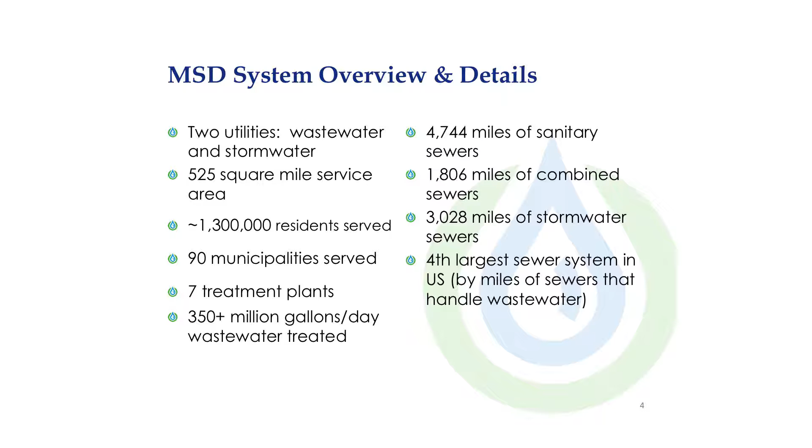How and why are we the 4th largest? Well, same reason we have 90 municipalities that we serve. As folks moved out from the city into the county over the years, they all wanted their own local police, fire, and other services, and they also wanted sewer service. So since 1954, when MSD was first created, we have taken in 79 separate sewer districts, all built to a different rhyme and a reason, a different standard, different processes for how they developed. And a lot of what we've been doing is harmonizing and bringing up to one standard all those systems.

Certainly, if we were to start over today and rebuild a new sewer system, it wouldn't be the type of system we would start with today, but it's what we have, and it's what we're working with, and we are doing a very, very good job with it.

I won't get into too much detail here, but sewer overflows essentially act as relief valves for the sewer system. When too much rainwater gets into the wastewater system, that water has to go someplace. Every sewer system has a finite capacity, so if you have rainwater getting into the system, it can quickly overwhelm the system. So in lieu of perhaps having thousands of basement backups every time it rains, these overflow points act as relief valves in area creeks and streams.

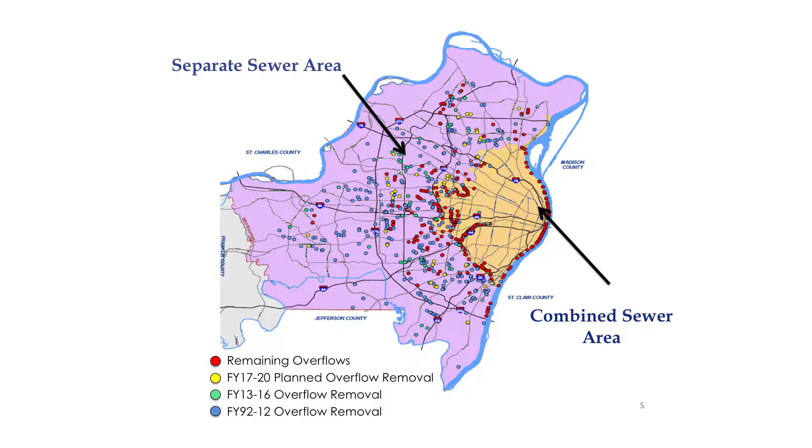What this map represents is our overflows that we have eliminated since 1992, or overflow points that will be eliminated or addressed in some way, shape, or form in coming years. Between 1992 and 2012, MSD spent over $2.7 billion to eliminate about 350 sewer overflows.

That work today continues in the form of MSD Project Clear. MSD Project Clear is a result of an agreement with the Environmental Protection Agency and the Missouri Coalition for the Environment. It calls for spending $4.7 billion over 23 years, and began for MSD in 2012. At its base level, it's our initiative to improve water quality and alleviate wastewater concerns throughout the St. Louis region.

How are we doing that? By making a long-term generational investment in our sewer system and infrastructure. It's building, designing, and doing work that totals billions of dollars of cost over a generation. So what do those various activities look like?

We also repair and maintain our system. That's another bucket for us, making sure we're developing and implementing best practices, doing everything we can to maintain that system properly, and that we're on a regular schedule for repairs.

In this category also, customer service. We have 1.3 million customers throughout our service area. We want to make sure that, especially as a government entity, we're providing the best possible customer service.

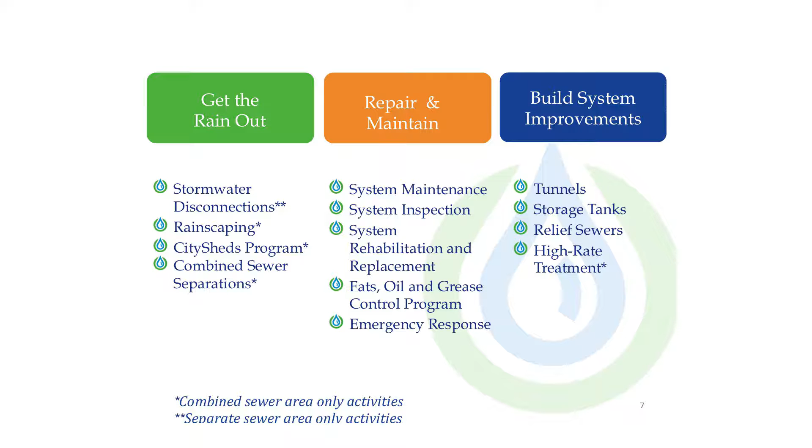We're also going to be building above ground storage tanks, and rehabilitating and rebuilding the existing sewer system as well. All total, this work is MSD Project Clear, designed to protect our system and serve our customers better, eliminate overflows in area creeks and streams, and alleviate basement backups.

Where do we stand now in 2017? We started MSD Project Clear in July of 2012, a continuation of work we've been doing since 1992. Since 2012, we have eliminated 36 of those sewer overflows.

That means we've stopped a combination of raw sewage and stormwater from going into area creeks and streams from 36 overflow points. By addressing overflows, you also address basement backups, so it's helping improve customer service.

But regardless if you know a lot about sewers or just a little, I think the one thing everyone can certainly appreciate is money. When we first started this program, looking at launching the first 4 years of MSD Project Clear in 2012, we thought it would cost about $971 million.

While the first 4 fiscal years of the program have actually come in at $905 million. So most importantly, we're bringing this program in under budget and on time.

Over the next 4 years, and we're halfway through the first year of that cycle, we project to spend another $1.6 billion. We certainly hope and plan to bring that in at budget and on time as well. But these are points we will always be accountable for to the public and transparent on, because this is the public's money we're spending. To reiterate, the first 4 years of MSD Project Clear came in on time and under budget.

With that being said, that's my update. We will now move on to the rest of our presentation, really the largest part of our presentation here, to talk about the next steps with stormwater. Joining me here to do that is Brian Hoelscher, MSD's Executive Director and Chief Executive Officer.

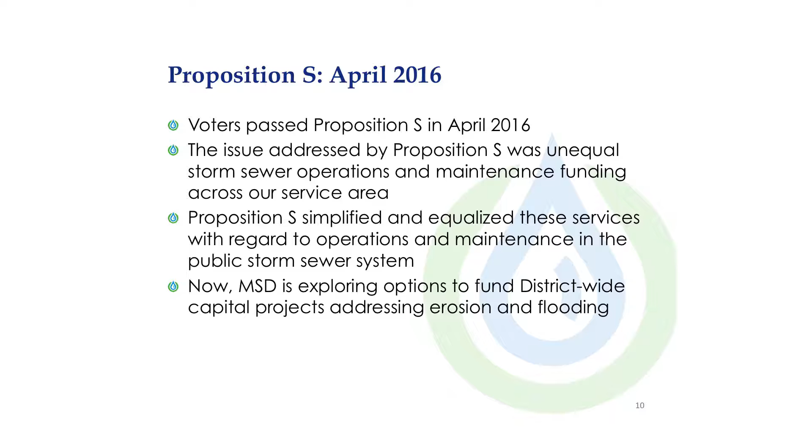With the passage of Proposition S, MSD now provides three main services district-wide. First, we provide stormwater management throughout our service area. We enforce rules and regulations for stormwater improvements, do stormwater complaint investigation and logging, as well as evaluating all stormwater issues within MSD's boundaries. We also do water quality sampling and monitoring of area creeks and rivers. We also have to monitor compliance with our Phase 2 stormwater permit.

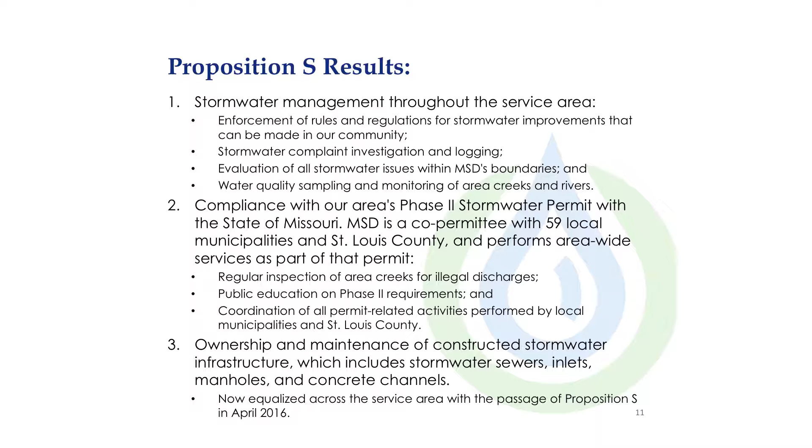We do this with 59 other local municipalities. The purpose of this permit is to help regulate and monitor the flow of pollutants that go with stormwater runoff into our local creeks and streams. And then finally, the last service with the passage of Proposition S is the operation and maintenance of the public storm sewer system.

On the next slide with the map, let's talk about where we're at with the passing of Proposition S. To begin with, MSD collects a 2-cent property tax. That pays for all the regulatory work that has to be done by MSD. MSD has always had this tax in place. We now have a 10-cent stormwater tax that allows us to operate and maintain the public storm sewer system throughout our district. That's a total of a 12-cent per $100 valuation property tax that MSD collects to provide services.

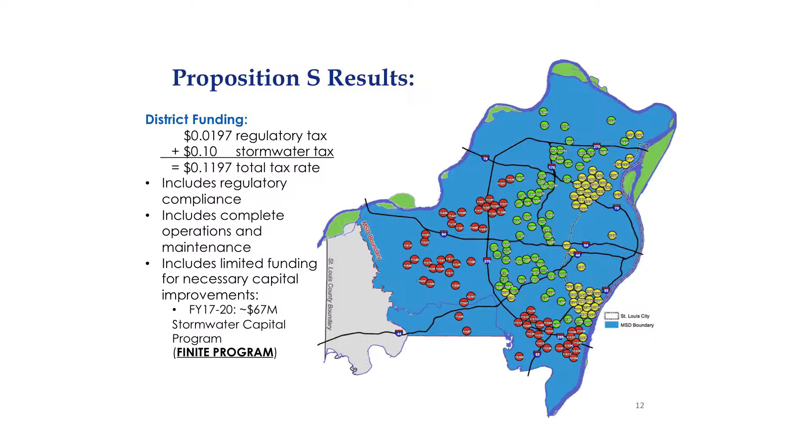With the passing of Proposition S, we also released a limited amount of funding in order to address flooding and erosion within the district. This is a limited program of approximately $67 million, and projects are located throughout the entire district, including in areas which have never had this kind of service in the past.

There's also regional flooding. This is the flooding of larger creeks and streams. We did experience back in December 2015 the flooding of the Meramec River, but similar type of events happen on some of the local creeks and streams, such as River des Peres, Fishpot Creek, and some of the smaller streams.

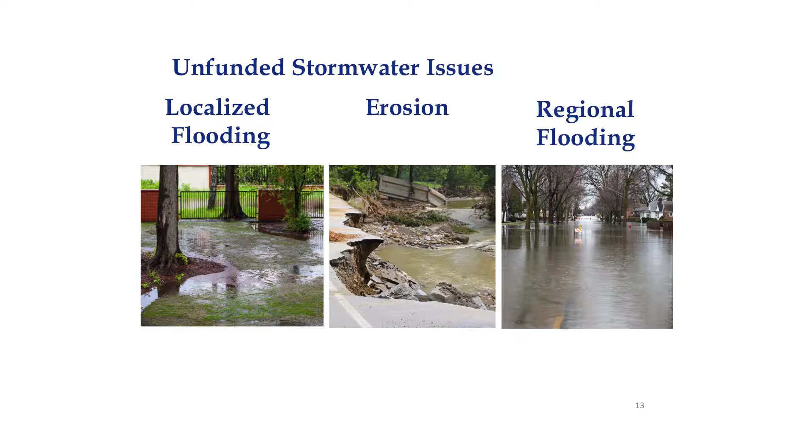We know we have these stormwater problems because we've gotten that information from you, our customers. Keep in mind, MSD does not own creeks and streams. Those are owned by the local property owners and in some cases the subdivisions. MSD is also not a flood control agency. Management of the floodplain belongs to the local municipalities in the area. However, MSD is in a place to be able to collect funding to address localized flooding, erosion, and regional flooding in the area.

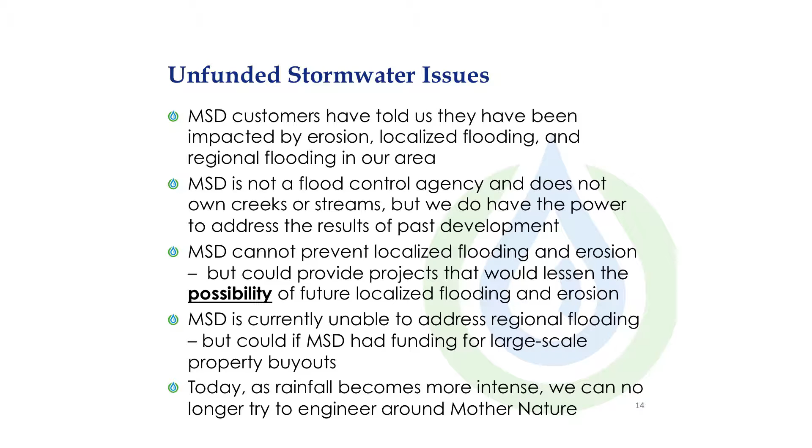If we do address this, you'll find out that MSD is not going to fight Mother Nature. MSD is seeing much larger storms in much shorter periods, and oftentimes you'll find the solutions we propose to be getting people out of the areas impacted by these types of events.

The next slide shows where these issues currently exist. The information we have here comes from customers. We've identified approximately 500 stormwater issues, which we estimate will cost approximately $500 million to resolve. You will note that the dots on the map are located throughout the entire district. Don't pay too much attention to where some of the dots are concentrated. That is really the result of past funding we've had. We find that if we have areas that have funding to resolve problems, we get more complaints.

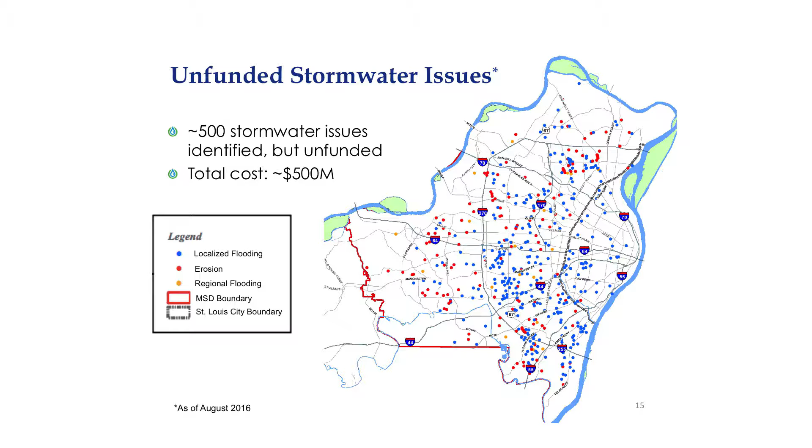You'll notice out west that the dots are a little thinner. The reason is we've never been able to resolve issues out there. As we resolve stormwater problems, we know that residents will come to us with other stormwater problems that they haven't mentioned to us before.

The next slide shows some potential solutions to stormwater problems. If you look on the left-hand side, property buyouts is a big one. In some places, there are homes which just shouldn't be there in today's environment. This is an area up in North City where we purchased out an entire subdivision where water got so high it actually came through the front door.

On the right-hand side, sometimes basin construction is the appropriate solution. We'll capture the stormwater in a place and keep it from presenting problems to the downstream property owners.

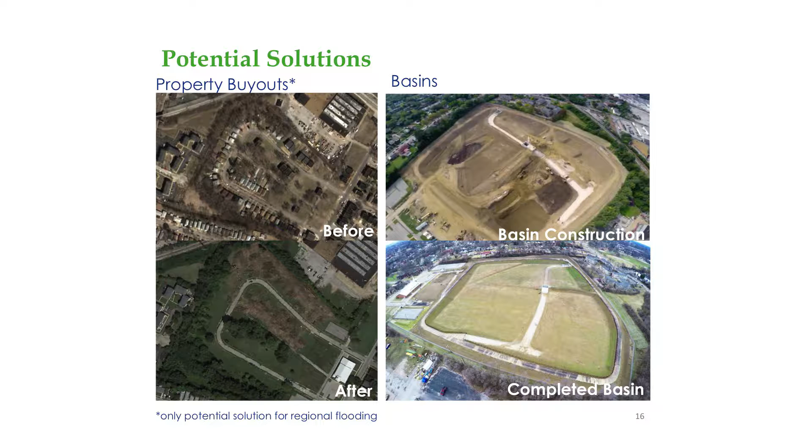Here are some natural solutions to creek bank erosion. If you look at the top two pictures on the left-hand side, you can see the erosion next to these homes. On the upper right-hand side, you can see what it looked like when the remains of Hurricane Ike hit the area at the end of calendar 2008.

On the bottom, you can see what it looks like after the improvements. On the bottom left, you can see the armored stone and the biostabilization used to reestablish the creek bank. On the right-hand side, you can see those improvements working during a large storm.

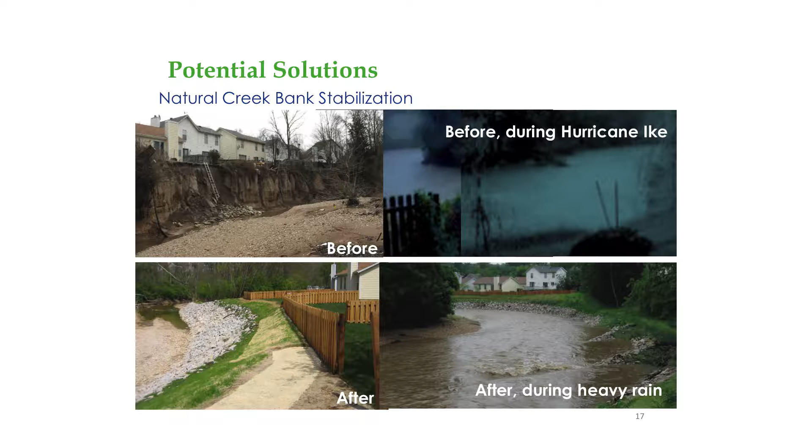Other potential solutions simply hold stormwater back or take it away from where it's causing a problem. On the left-hand side is an example of rainscaping. These are basins which do two things: one, they allow the stormwater to percolate into the ground and not run off; they also provide storage, keeping that water from causing flooding problems downstream.

It's also possible to put in the typical storm sewer. Sometimes we just need to move stormwater from where it's causing a problem to further on down the line where it can be properly handled.

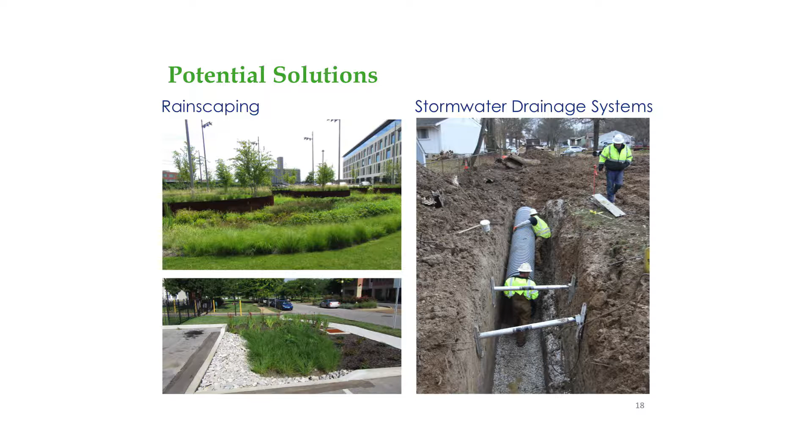So putting this all together, let's look at those key problems and what some of the possible solutions are. What are the three key issues that the customers have given us? One is localized flooding—backyard or local flooding that may cause problems on streets as well.

What are some of those solutions? We can put storm sewers in to move the water to where it won't cause a problem. We can potentially buy out properties. In some instances, the stormwater local ponding problem is on one property at the bottom of the hill. Oftentimes, the proper solution is to simply buy out that property owner and allow that property to serve as the place where that stormwater gets stored.

We can also do rainscaping, holding back the stormwater so it doesn't cause the problem in the first place. Next, erosion—two ways to address that. One, you can fix the erosion through some kind of natural creek bank stabilization.

The other thing is property buyouts. Sometimes the erosion is so bad that the proper thing to do is simply buy out the properties that are impacted and then use the eroded area, fix it, and allow that to serve as the conveyance for stormwater in the future.

Finally, regional flooding. This includes examples such as the Meramec, but folks have experienced regional flooding on floodplains throughout the area. The only potential solution is to buy those properties out.

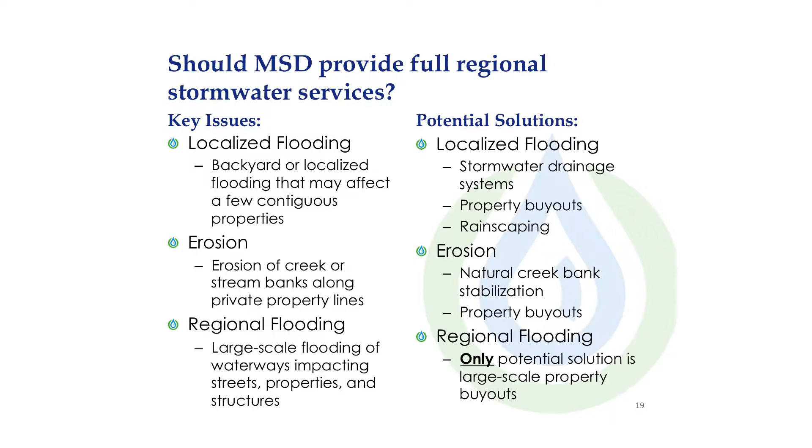MSD has learned that you can't fight Mother Nature. If people are in areas that flood, the proper solution is to buy those properties and allow them to move to a different location. There's some key information we need from you, our customers.

What is a priority? I've now listed three potential problems that we've already heard from customers. What are the priorities of these three services, and are there other services that we should consider?

A big issue is how does the public want to pay for these services? Currently, MSD uses a property tax method to collect revenues for stormwater services. That is a tried and true method that everybody is familiar with. There is another mechanism for stormwater, and that is an impervious fee. Impervious area is the area where water is not allowed to soak into the ground—this would be rooftops, streets, sidewalks. The water hits those surfaces and simply runs off.

We can charge people based on the amount of impervious area. One of the reasons that's a possibility is the impervious area is a good measure of how much of a problem is being caused by a particular property. There are pluses and minuses to both methods.

We want to hear from the customers as to which option they feel is more equitable.

The next question is how much? We had indicated about a $500 million problem. How fast should we go after addressing that issue? I'll give you some data on the next slide showing what that looks like.

How often should we collect rates? We can collect the cost on a monthly basis. If we do, MSD probably has a good chance of collecting all the funds it charges for. The downside is it will cost customers more—monthly billing is more expensive than annual billing. If we bill annually, it's less expensive, but we probably have a better chance of some folks not paying the bill.

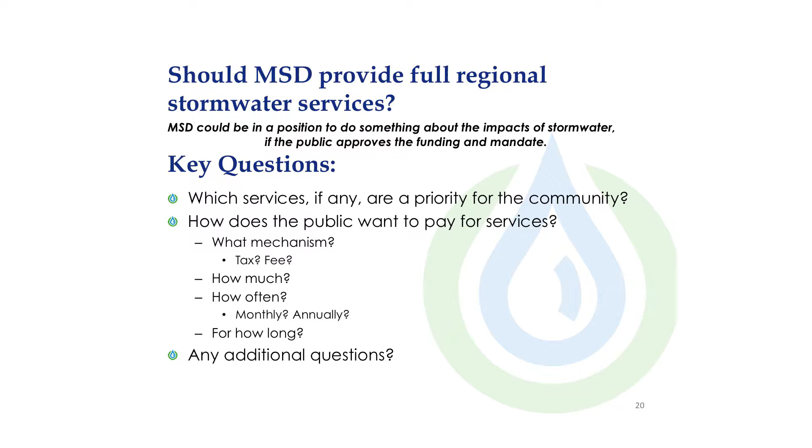The other question is how long should we collect this new revenue source? Should we sunset it? Should voters have a chance to decide that's enough and spend their money elsewhere? We're going to find out what folks think about that, as well as any other additional questions they may have.